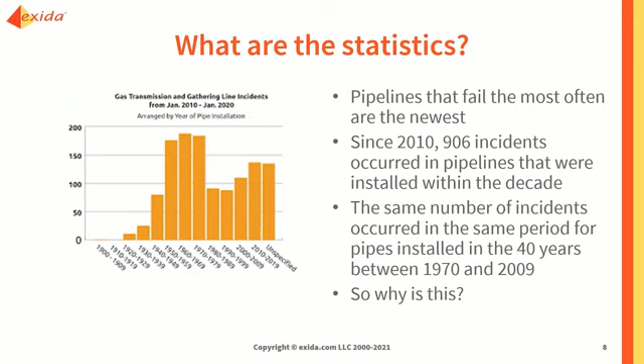So why the sudden change and increase in such a shorter time? This was an interesting conundrum. And I suppose one could speculate on a number of reasons why that is. There could be time pressures to get the pipelines installed quickly and operating. It could be cost driven, so that there are shortcuts taken. Who knows? But the statistics are quite alarming. And when you look at the cause, it's interesting that in the majority of the cases, it was equipment failure that caused this. Approximately 32% was due to equipment failure. So this is new equipment that's going in. So again, that's puzzling. Why would we have equipment failures of that level?

And again, you could speculate. You could say, well, equipment failures could be due to a number of things. It could be due to some configuration issues. It could be the fact that we're using the wrong equipment. It could be that we're not considering the application properly. It could be a number of things. And then corrosion failure was the second most common reason. About 19% was due to corrosion. So here again, if these are relatively new pipes, then why would we be getting these sorts of problems? And interestingly, there is a program to replace some of the old cast iron pipes with plastic pipes, but that's an ongoing process, of course.

And there's something like 2.8 million miles of pipeline in North America at the moment, and some of it is considerably older than the last 10 years. So you'd expect there'd be problems with the older pipes, not with the newer ones. So this is another interesting area. And of course, what's been highlighted recently with Colonial is that cybersecurity should also be considered, because major pipeline infrastructure is a potential target, infrastructure in general. We know that from the utility side, they've had to tighten up since a number of instances occurred probably 10 years or more ago now. And of course, wastewater and water treatment. There was the case last year and again earlier this year. So these are potential targets for would-be attackers. And this group called DarkSide claimed responsibility for the Colonial pipeline hack.

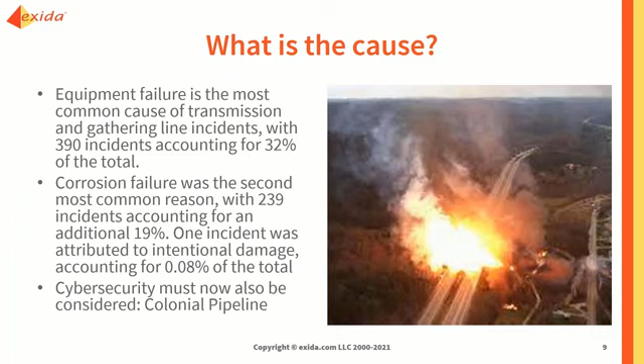Leakage is also an issue. Apparently, 0.35% of the volume of gas lost in transmission is mostly due to unintentional leakage. About a tenth of it is due to intentional, where it's vented or flared. So this means that 0.315% of the gas is released unintentionally.

And it may seem like a very small number, but again, if you put it into perspective, if we just consider the Atlantic Coast Pipeline, which is scheduled to transmit about 1.5 billion cubic feet of natural gas per day, the expected leakage is around 4.7 million cubic feet per day. And over a year, of course, that's about 1.7 billion cubic feet. And putting it into perspective, that's enough gas to provide to all Pennsylvania residential consumers for about 13 days in August from just one pipeline.

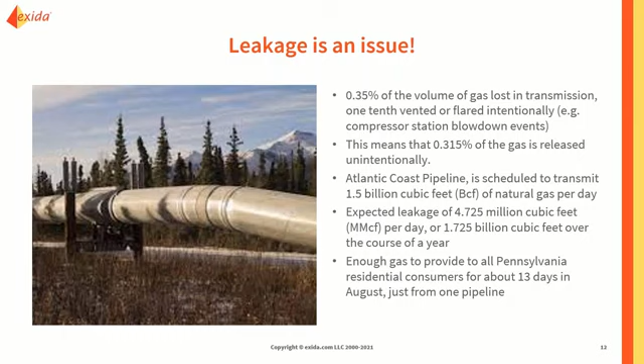Coming back to cybersecurity now. So what Colonial did, of course, was highlight the need to adopt cybersecurity as part of the overall site process safety. Now, it's interesting that there is an American Petroleum Institute standard to cover cybersecurity for SCADA systems. But again, does it go far enough? And one of the things that we'll look at is, could we be looking at a different approach?

In fact, the Biden administration will now mandate cybersecurity regulations for the nation's leading pipeline companies. Up till now, it's mostly been following DOT or TSA requirements. And of course, the Department of Homeland Security now will require pipeline companies to report cyber incidents to federal authorities. So it hasn't really been a mandatory thing to do that, but now they're going to push to have this done. And the White House has also launched a new strategy to tackle the growing threat to the critical infrastructure beyond what's been done before.

Because critical infrastructure is an obvious target for external potential nation-state attacks. And for example, with DarkSide, it's suspected that they are based in Russia, although so far, to my knowledge anyway, it hasn't been proved. But I mean, at all points, I think the federal government is convinced that's where it's coming from.

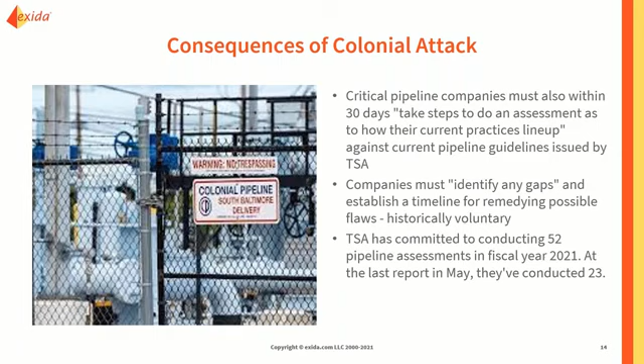So what are the relevant standards that are applying? And mostly it's the American Petroleum Institute range of standards. API issued 2 standards in 2020. One was the recommended practice 1182, which was the construction, operation, and maintenance of large diameter rural gas gathering lines. And then the second edition of RP80, which is the definition of onshore gas gathering lines. So the purpose of these 2 were to enhance safety and operational efficiency to meet state and federal rules for ensuring safe operation of these pipelines.

Typically, API 1160 is the overall standard to cover all pipeline integrity. So there's a range of standards that we will see that cover certain parts of it, but the overall is 1160. And then you have API 2350 that covers storage facilities and automated overfill protection systems. So all of this is great.

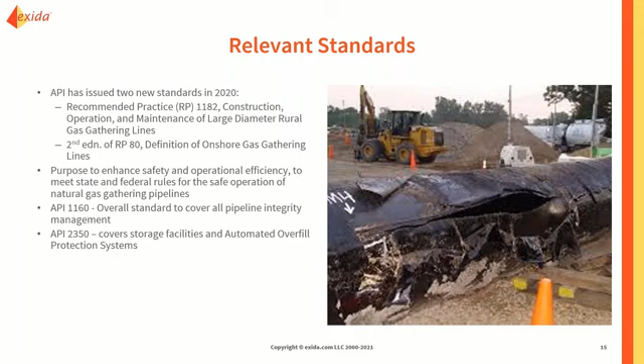But the thing about these API standards, yes, they talk about addressing risk, but they really work on a plan, do, check, act process. And this really comes down to culture and, of course, the leadership and management commitment to do this right.

However, even though they talk about risk and it is a form of RAGAGEP, recognized and generally accepted good engineering practice, there are things that could be done better if we took a more risk-based approach. Yes, they address risk, but not to the levels of, for example, the way IEC 61511 does, or IEC 62443, for the functional safety and the cybersecurity, as well as the alarm management.

So API 1130 looks at design and implementation of leak detection systems. API 1149 is the theoretical calculation of possible leak detection performance. 1164 addresses pipeline SCADA security, and 1165 is testing verification of SCADA HMI displays and designs, and 1175 is the standard for the selection, operation, maintenance, and continuous improvement of leak detection systems. So all of these cover various aspects of the requirements.

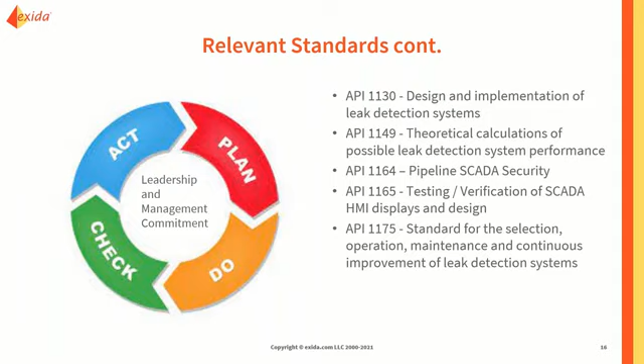But it's interesting because, as I said, one of the reasons why I started thinking about this and decided to do a webinar on this was from some of the conversations that I've been having. And most midstream operators will say, yes, we have pressure protection, we do valve misalignment protection systems, we have leak detection systems, we have vibration detection systems for pumps and compressors, we have fire and gas detection, we have seal leak detection. So why do we need to think about IEC 61511 and putting in safety instrumented systems?

Well, the thing is that all of these are in the BPCS, and the basic process control system is not required to have the level of rigor applied to it that you would with a safety instrumented system. Yet, most of these systems are there to help provide safety. Pressure protection. If we have an overpressure situation, we need to know that our pressure protection is going to work reliably. So this is really where there's a false sense of security.

The same with pipeline monitoring systems that are looking at the thickness. The Philadelphia Energy Solutions explosion, I think it was June 2019, they found that at the point where the fracture occurred, which caused the massive leak and ultimate explosion, the pipe thickness was less than that of a credit card. And yet they had a pipeline monitoring system. The problem was that it didn't cover that particular section of pipe. So again, these things can lull you into a false sense of security.

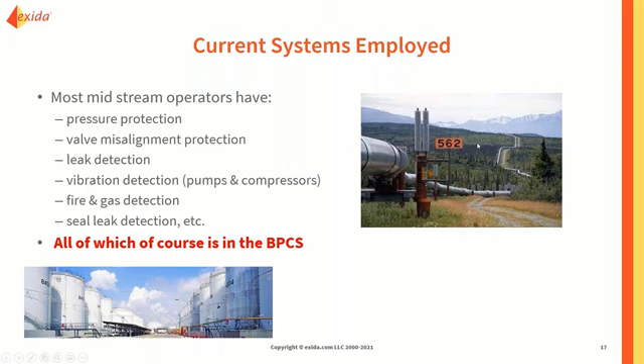Because here again, some of the counterarguments I've had when talking to some midstream companies is that, well, we don't need to put safety instrumented systems in. We don't have any. We don't need the cost. Yet, when you talk to them about, okay, how many shutdowns do you have? How many failures are you getting? There are a significant number of trips and failures due to equipment.

So here again, the short-sightedness is that it's going to cost me a lot of money if I do this. But actually, if you do this, there might be an initial expense, but over the longer term, you'll get the gains of having fewer trips, fewer failures, fewer problems, less likely to have incidents. Because dear old Trevor Kletz used to say, if you think safety is expensive, try an accident.

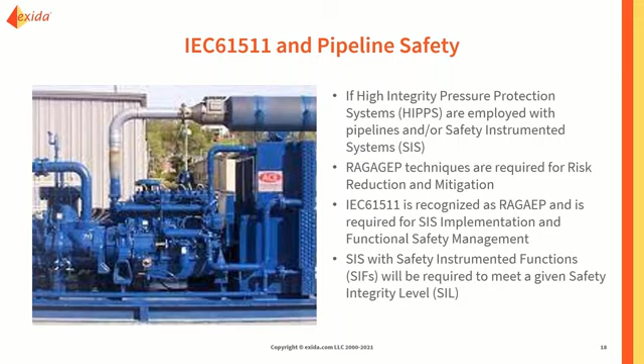So safety instrumented systems with safety instrumented functions would give them that level of risk reduction. And of course, if we follow the life cycle, then we will make sure that we continue to achieve the level of performance that's desired. Same thing when it comes to the security.

API 1164 covers the pipeline SCADA security, but we could apply IEC 62443, because again, following the life cycle approach, this is where we would do our risk assessments. We'd look at our critical infrastructure, the critical equipment. What happens if that equipment is compromised, or if it can be disabled as a result of a cyber incident?

Then we can look and see, okay, what countermeasures do we currently have? What can we do to improve that? What security level requirements are there? So again, taking a risk-based approach, using a performance-based standard, means that we can utilize technology.

We're not hamstrung by a prescriptive approach that says you have to do this, this, and this, and we can utilize the latest techniques. However, being a risk-based approach, we would have to have key performance indicators to be identified for tracking. That's not a big deal. We could do that. So this again would ensure that it's not a once and done.

And the problem is a lot of people think that, okay, I've got the system in, I'm protected. Well, that might be fine from day one, but over time that's going to change, as we all know. So the life cycle approach means that we continually ensure, by tracking, monitoring the data, monitoring incidents, looking at failures and alarms, trips, etc., we can monitor that, we can improve it if we're finding we're getting a lot of these occurring.

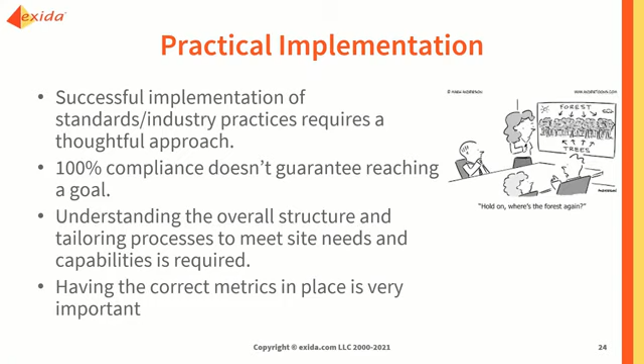So from a practical point of view, successful implementation obviously requires a thoughtful approach. You've got to think of it carefully. Just complying with a standard doesn't necessarily mean we're going to reach a goal. So we need to understand the structure, tailor the processes to meet the needs of the sites and the capabilities required. So this requires us to understand what is the competency of the people we have, what equipment do we have in place, what do we need to have in place, and what are the metrics that we have to have in place to be able to measure.

Some of you have been on my webinars before and heard me teach, and I'm always going on about this point. You've got to have the right culture, otherwise it's going to be very difficult for the people that are trying to implement this, because it'll be like pushing on a rope with management pushing back every time you need to spend money and do things to ensure that we're meeting the requirements.

Having an open and learning culture is very important, because the whole point of this is that we want to learn from the operational side of things. So if we are getting a large number of incidents or equipment failures, we need to understand why. We need to take steps to fix that. If we see that operational processes are being shortcut or procedures are not being followed properly, then people should be able to speak up and say that without fear of any retribution, which can happen. So doing things right and doing the right thing should be the mantra.

So we make sure that the O&M people are properly trained, follow procedures, we're doing the mechanical integrity, we do inspections, we do the testing correctly, we use metrics to help us with this, and we document everything. Whether we use software tools to help with the documentation or not, we need to do that. If it's done right, as I've said, it will save time and money. And it is a long-term investment with some short-term gains that can be got.

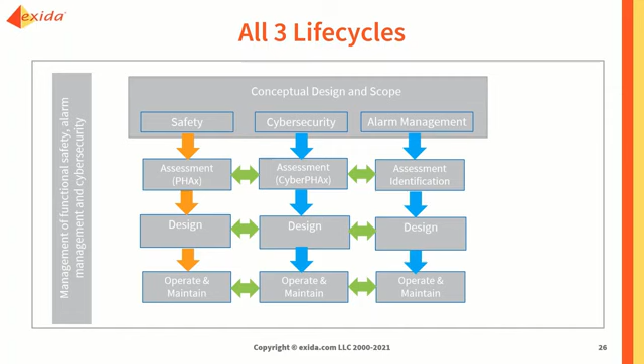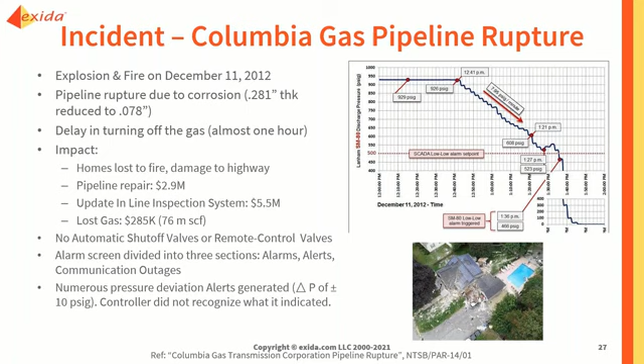The alarm screen itself had been divided into three sections for alarms, alerts, and communication outages. And there were numerous pressure deviation alerts being generated. The delta pressure was about plus or minus 10 psig. And the problem was that the controller didn't recognize what it indicated. He couldn't figure it out.

So why didn't he take the right action? Well, first and foremost, there was incorrect diagnosis. He didn't realize that the rupture had taken place until after being called by another controller. There was no documentation or training on the expected response to alerts. There was a lack of situation awareness as well.

The alerts weren't configured to provide specific meaning and, of course, timescale for response. The alert display showed the value of the change, the delta P, but didn't indicate whether it was increasing or decreasing, nor the actual value of the pressure.

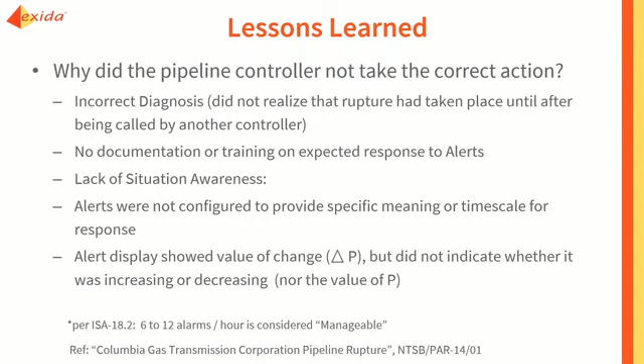So what is the difference then in this cognitive load on the operator? So to reduce the frequency of nuisance alarms, what they did was they defined the SCADA system with alarms and alerts, and only the alarms were counted in the KPIs. So for example, 2 per hour if they're outside of safety-related parameters, but the alerts were 95 per hour outside of operator-defined controlling parameters.

So again, per the 18.2 standard, you should have no more than 6 to 12 alarms per hour. This is considered manageable. In other words, no more than one alarm every 10 minutes, for example.

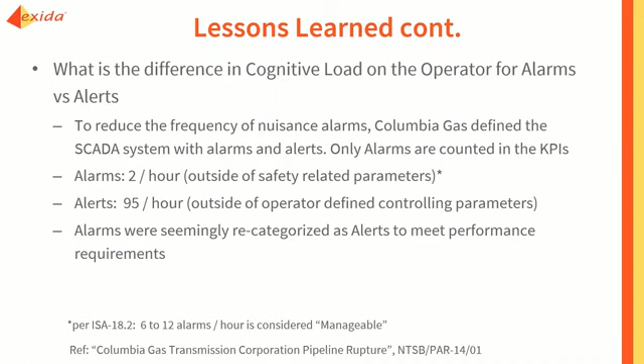So these alarms were seemingly recategorized as alerts simply to meet performance requirements. So there was a playing, if you like, with how the alarms were defined, which caused the problems because they weren't properly defined, and because they were nuisance alarms, they were just recategorized as alerts without really looking at why we are getting that.

So clearly, we need to be able to measure performance. If we're going to take this approach, which to me seems to be a sensible approach to take, by implementing performance-based standards that are not prescriptive, defining what the risk is, assessing that risk, implementing the correct mitigation steps to reduce that risk to tolerable levels. So we need to be able to measure the performance of these when applied to either the safety instrumented system, the BPCS, and any SCADA applications.

So we've got to have these metrics in place, and we could use leading and lagging indicators, of course, but there are other metrics that can be used. The point is we should be measuring. So this means we should be following this life cycle approach.

In my estimation, I believe that if we do this, we could help reduce pipeline incidents by taking a more performance-based, risk-based, holistic approach to understand what the hazardous risks are and the associated consequences, and then what we can do to mitigate that in a cost-effective manner that meets the company's requirements and also provides a safe operating environment.

We know cybersecurity is a real threat to infrastructure. It can't be ignored, and of course now it's not going to be ignored. It's going to be pushed from the federal point of view. So cybersecurity coupled with proper alarm management and functional safety processes and procedures will definitely help us improve our performance. And if we have the learning environment where we can utilize the results from the metrics, we can help improve how we manage risk and maintain it throughout the lifetime of the systems.

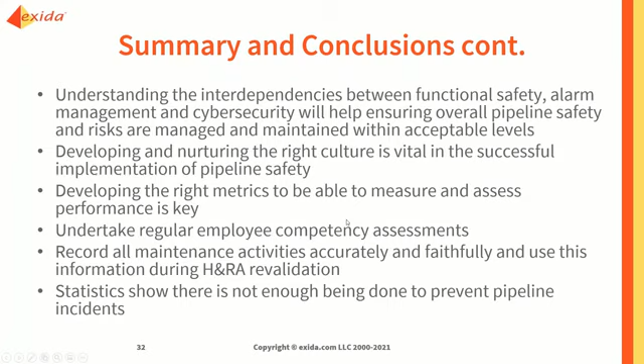It looks like somebody does. Can you share some information on what happened to the Colonial Pipeline? What type of attack? Well, it was a ransomware attack. At least I've not seen too many further details on that. I'm sure that eventually it will come out.

And this is part of the problem, when companies get compromised, they don't necessarily want to share that. They don't necessarily want to wash their dirty laundry in public. And to a certain degree, I don't blame them. The thing is, unless we know how these incidents occur when it comes to cybersecurity and how people are compromised, how does ransomware get in there? How did they exploit a weakness?

And one of the things that we talk about when we do the cybersecurity training is to highlight the fact that of the incidents that occur, about 80% of the time, it's because of what we call the stumbling, fumbling, and bumbling, if you like. It's the basic awareness, cyber hygiene, because people don't think about certain things.